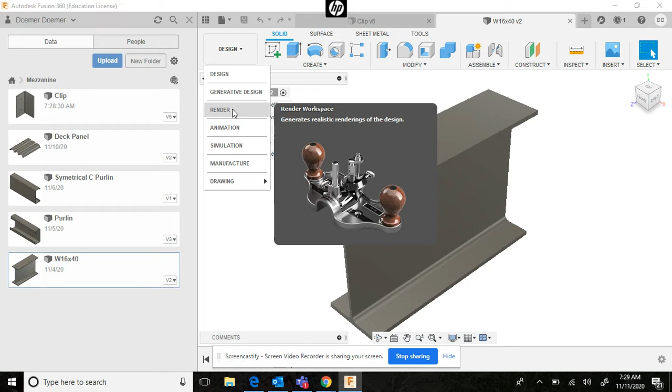And once you get in the render mode, you can actually use the setup pull down menu to change your physical material. All right. In this case, we're going to be looking for ASTM A36 steel. So scrolling through all the different types of materials: bronze, iron, platinum, stainless. And the steel choices are quite lengthy, as you would expect. But we want the ASTM A36 steel, which is near the bottom.

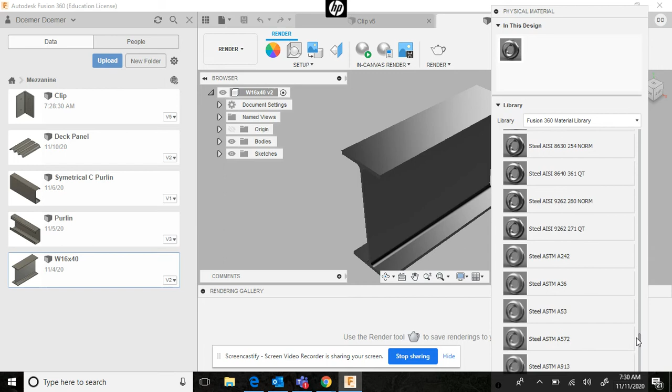And once we find that, we will click and drag the ASTM A36 onto our beam, thereby changing the way our software treats that material. It's not just a display setting, it will actually demonstrate load properties and tests in the future correctly based on the physical properties of this material.

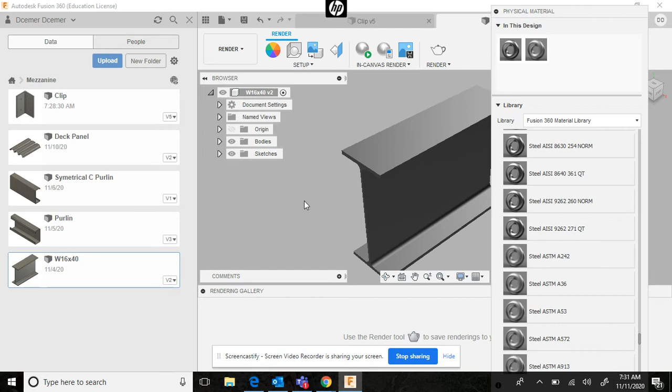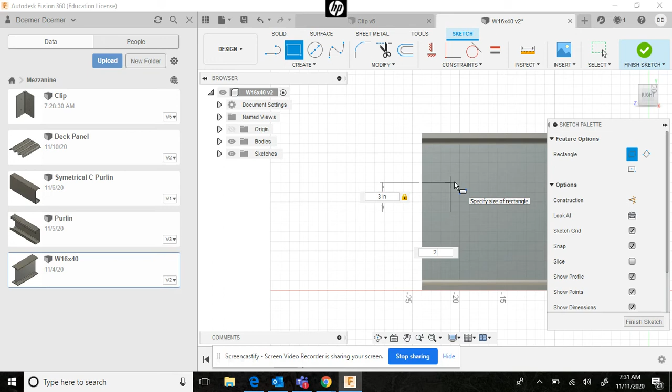At that point in time, we're ready to go back to the design, and we need to prepare some holes today. I will be making a temporary sketch because we want to attach a clip to this surface right here. I'm going to use some temporary geometry snapping to the midpoint. I am going to make a 3 by 2.75 square right there, or rectangle right there. And I'm going to create a hole diameter of 0.75 to match up with my clip holes.

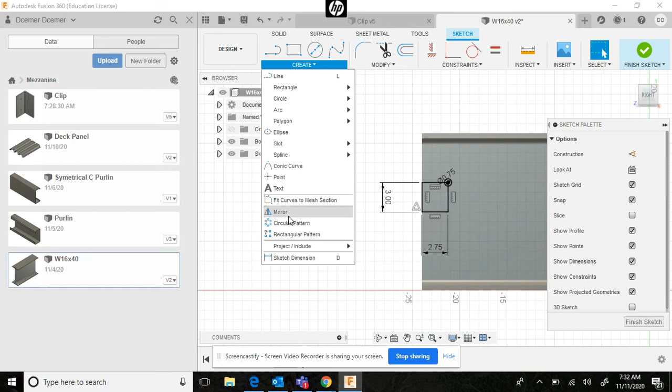And then I'm just going to repeat the workflow with a mirror from the create menu, mirror. Just going to use that circle right there. And my mirror line would be this that snapped to the midpoint. And once I say OK, I no longer need this temporary box that I created, although it might be helpful for me to leave a couple of dimension lines for reference. So I will be leaving those. At that point in time, I am ready to finish my sketch.

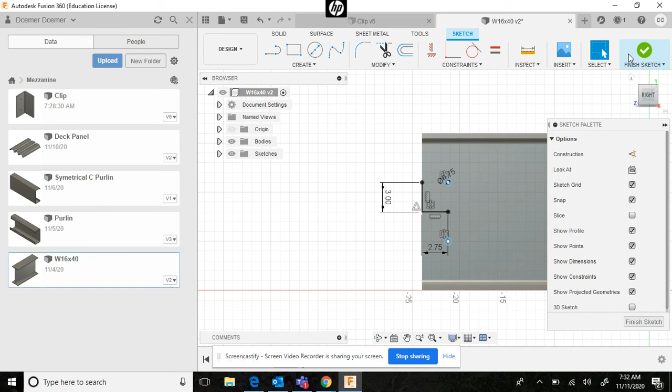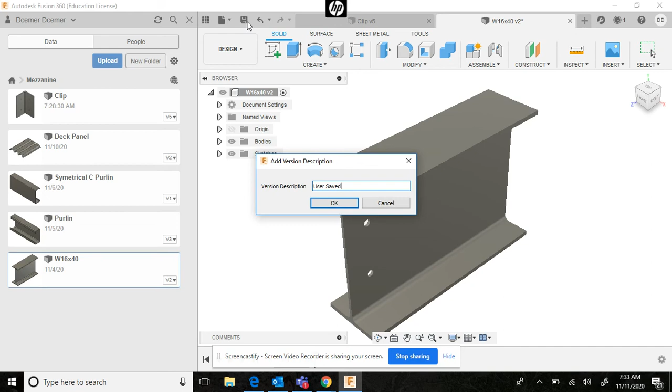And then extrude. I want to make sure that I extrude each of these in a negative direction so that it turns red and cuts through the material. That would allow me to accept the clip, and I'm going to save that material. Say OK. I have also gone into the clip and I went ahead and changed the properties on that. I'm going to right click and show the properties. The physical material, ASTM A36.

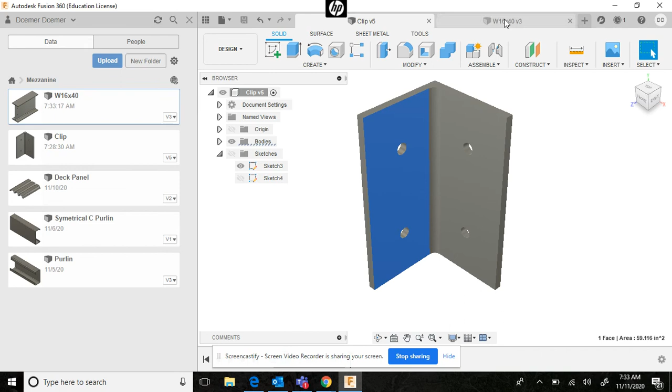In today's activity, even though I'm just showing the W16 by 40 and the clip, I do ask that you go ahead and turn all of your metal parts to the ASTM A36. Your appearance will look like rough steel, and that is fine. Once you are finished, you don't have to upload a shared public link today, but I do ask that you capture an image of your steel beam with the holes punched in it. Upload that to the hub when you have that image completed. From the file menu, capture image.